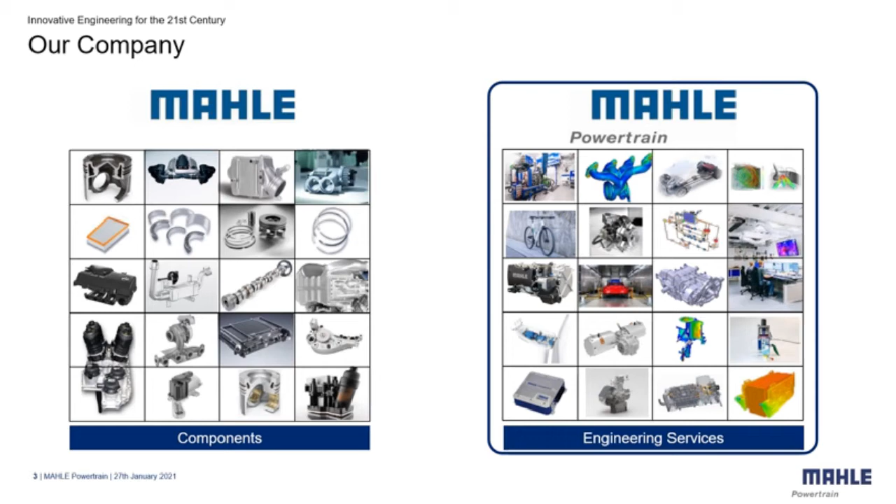Over the last 10 years, MAHLE Powertrain has been developing capabilities to enable us to support our customers with their hybrid and full electric propulsion systems, from bespoke transmission and battery packs to electric motors and power electronics. Whilst we focus on design and development of advanced vehicle propulsion systems, we also offer support to our customers for any part in the process, including the provision of prototype manufacturing.

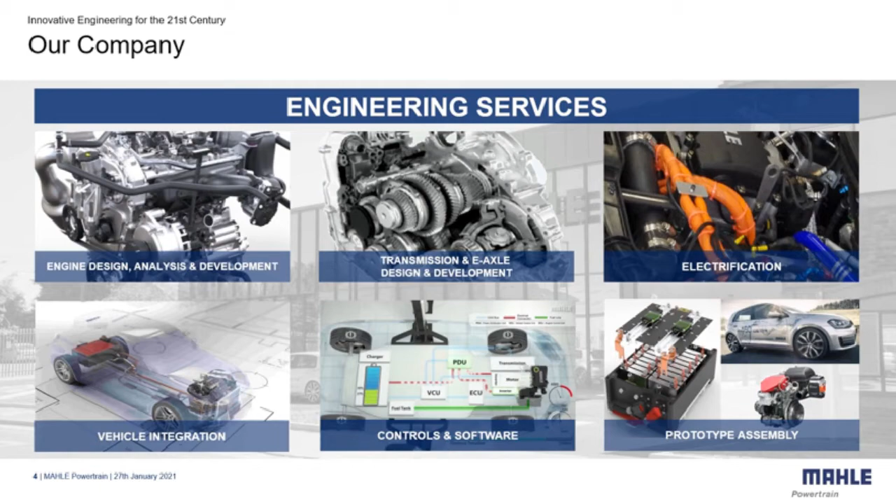I shall now take you through our core competencies. In design, we use our engineering capabilities to lay out designs for battery modules and packs, design high-performing internal combustion engines from clean sheet or as performance and emissions upgrades. We also design transmissions, e-axles and e-motors. We have a reputation for delivering running hardware to tight timescales, with many examples of hardware in less than 9 months.

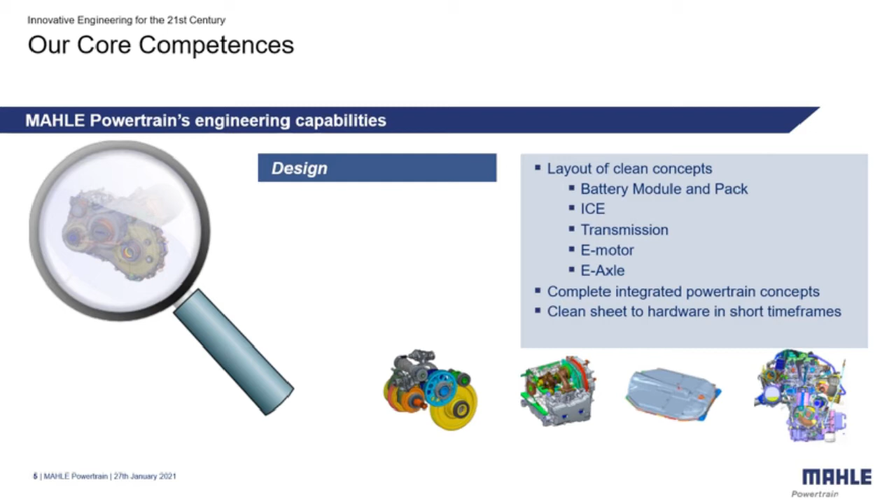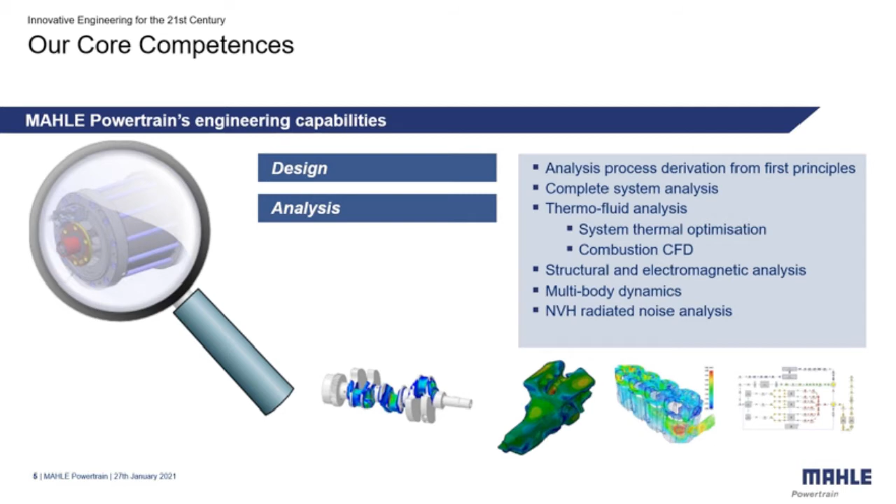In analysis, we have a strong team using a combination of 1D, 3D and thermofluid toolsets. We also have specialist gearbox and driveline software for analysis and optimization of transmissions. In development and testing, we have a lot of experience in hardware selection, development and validation. We're specialists in combustion system development and optimization processes, which are focused on meeting stringent future emissions standards.

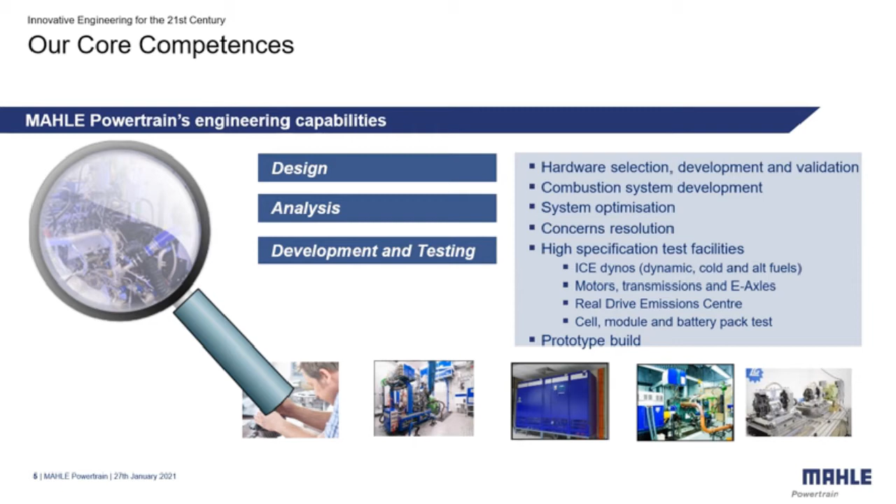This development capability is complemented by our well-resourced facilities, which include battery testing, internal combustion engine dynos, e-axle and transmission rigs. We also have our real drive emissions centre for testing vehicles under climatic conditions, which is a key part of our RDE process. In calibration and controls, we are very experienced in base engine optimization and base vehicle calibration. We're also experienced in developing demonstrator vehicles for performance upgrades and for newer technology assessments.

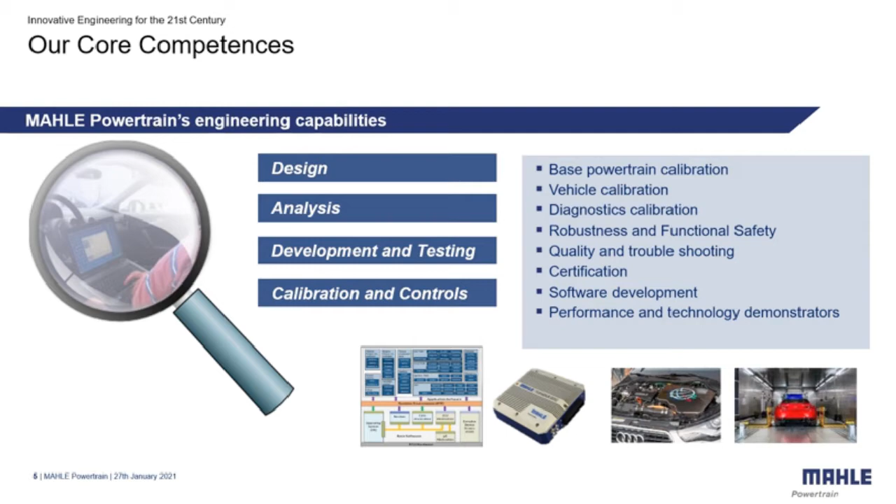Our tools and core competencies have allowed us to deliver exciting automotive projects. This is just a selection of high-performance automotive programs that we've been involved with over recent years. They include high-specific output internal combustion engines, novel combustion systems, transmissions and complete powertrains.

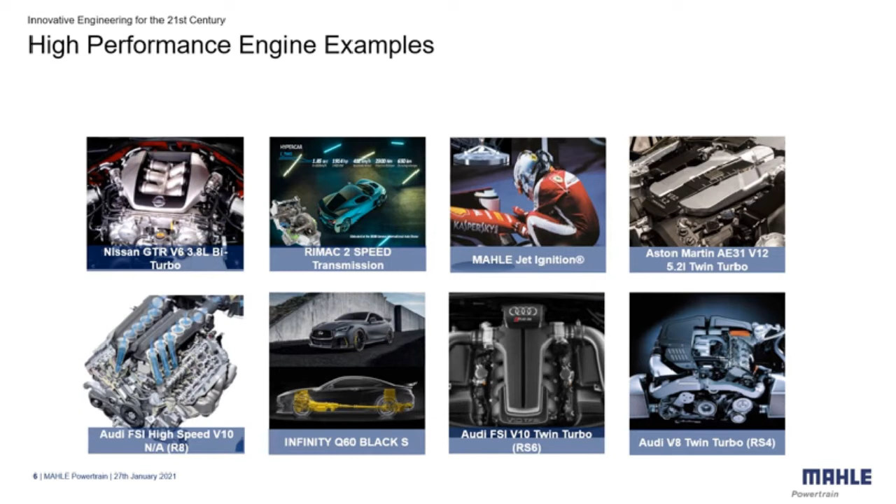So who are we and where do we come from? We're a team of talented people committed to creating innovative and sustainable solutions for our customers. MAHLE Powertrain can trace its roots back to the foundation of Cosworth in 1958, and in 1986 it put its first engine into production, the Ford Sierra Cosworth. In 1998, the road car division of Cosworth was acquired by Audi, creating Cosworth Technology. Then in 2005, MAHLE purchased Cosworth Technology from Audi and created MAHLE Powertrain. So MAHLE Powertrain has been active in the automotive sector for over 60 years.

During this time, our talented engineers have developed their skills in a broad spectrum of disciplines ranging from fundamental research, concept design, modelling, analysis and simulation, through to prototyping, testing, calibration, software development and systems engineering. These toolsets, coupled with our in-house developed tools and techniques, have also been successfully applied across multiple non-automotive sector projects to provide technical solutions for our ever-increasing range of customer projects.

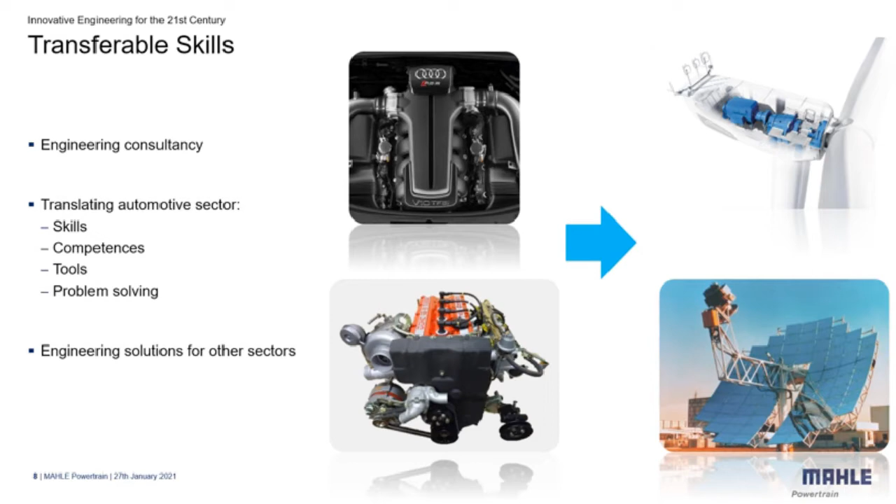In this next section of the presentation, we're going to take you through a selection of example projects showing how MAHLE Powertrain has diversified from our core automotive powertrain activities, delivering solutions into different areas, including renewable energy, aerospace, medical, off-highway, stationary power generation, and e-mobility.

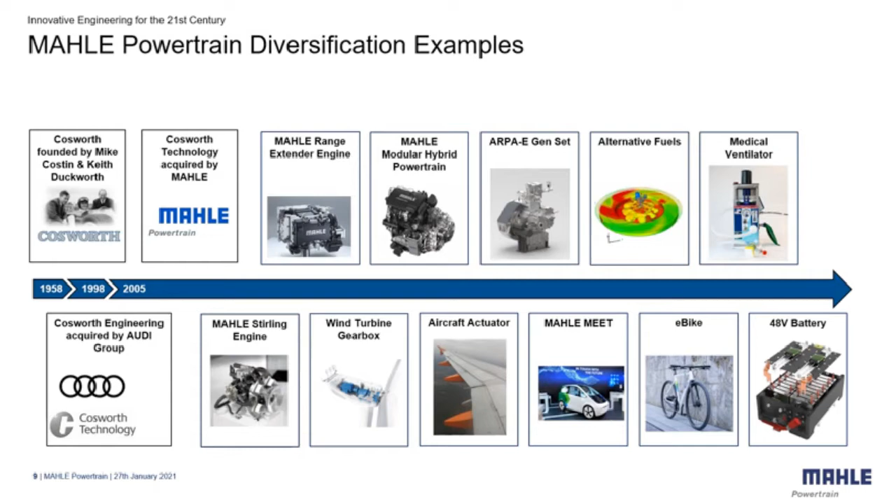The fast-changing legislative emissions and efficiency requirements for vehicle powertrains pose significant technical challenges. We've been developing innovative solutions to meet these requirements for future sustainable powertrains. During the past decade, the pace of this change has quickened and led us to develop a host of new capabilities and skills which we want to showcase today. Furthermore, we want to show how MAHLE Powertrain are able to support our customers to overcome their technical challenges.

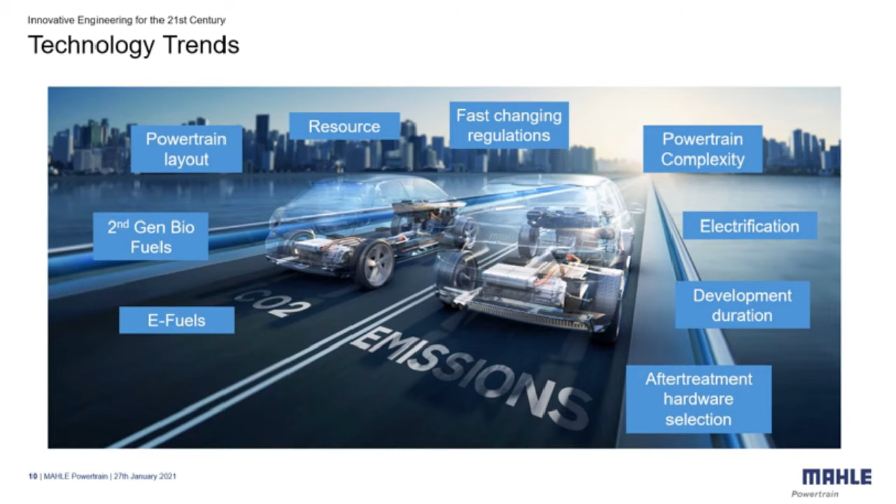Nowadays, we're all familiar with the concept of the electric vehicle, which is powered by an electric motor, and the sole source of energy to propel the vehicle is provided by a battery pack. 10 years ago, when we began our range extender project, the typical range of an electric passenger car was only around 80 to 250 kilometres, or 50 to 150 miles. The range of vehicles was limited by the large size, weight and high cost of the battery.

The idea of the range extender is that by the addition of an onboard generator, which could convert a liquid or gaseous fuel into electricity, the battery pack can be charged whilst the vehicle is moving. This enables the battery capacity to be optimised to the capacity that's needed just for typical daily use. And then for longer or infrequent journeys, the vehicle can be refuelled using existing conventional infrastructure, and the driving range is effectively limitless.

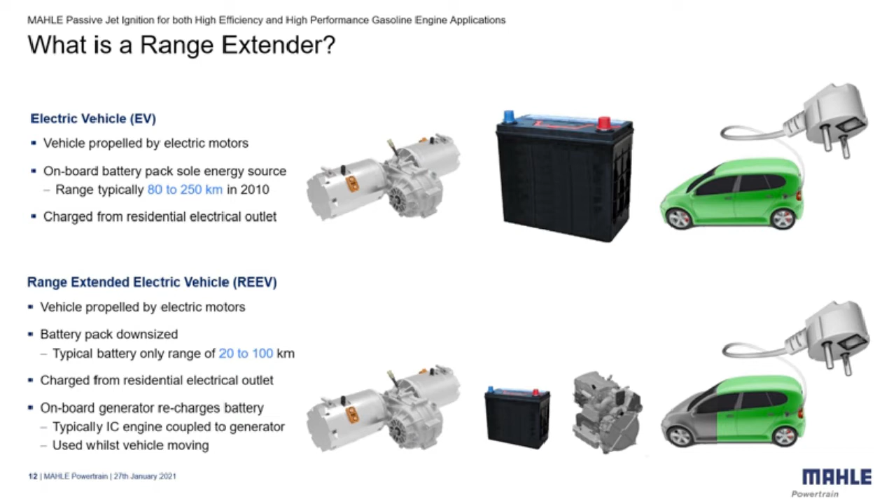As an initial step into hybrid and electric powertrain technologies, at the beginning of 2010, MAHLE Powertrain set about designing an engine specifically for use as a range extender. We undertook a concept study, produced the final design, and built the running prototype in under 12 months. The range extender engine design has been focused on meeting the requirements for a small to mid-size passenger car. During the concept phase of the project, key attributes for the engine were identified, and the resulting design has been targeted to achieve a very compact design with low weight and a low manufacturing cost.

To minimise size and weight, the axial flux generator is fully integrated into the crankcase of the engine, with the rotor mounted directly onto the crankshaft of the engine, like a conventional flywheel, without any separate bearings. To maximise the flexibility of installation and to maximise commonality across a range of applications, the unit can be installed either vertically or horizontally, using the same major castings.

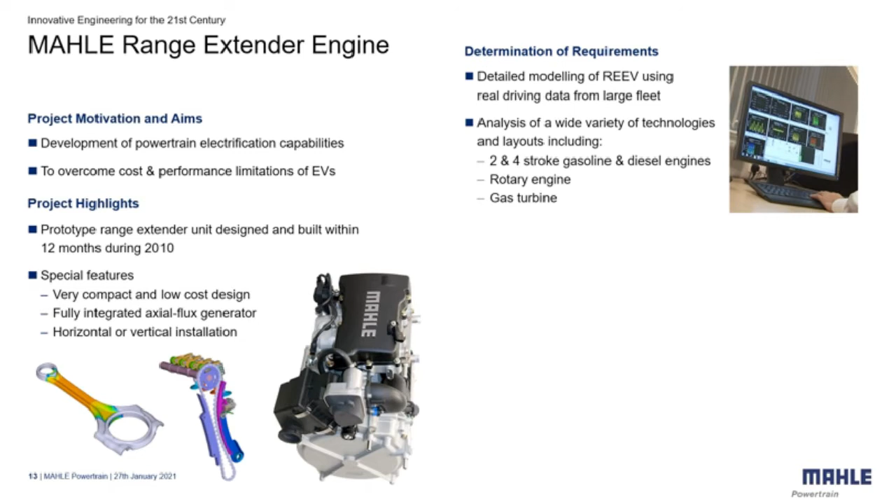Detailed vehicle analysis was performed to determine the required specification for the range extender. A wide variety of technologies were considered during the concept phase, including both 2- and 4-stroke engines and rotary and gas turbine engines, amongst many others. The project developed MAHLE Powertrain's capability in the design and testing of high-voltage electrical components and our capability to test high-voltage traction motors.

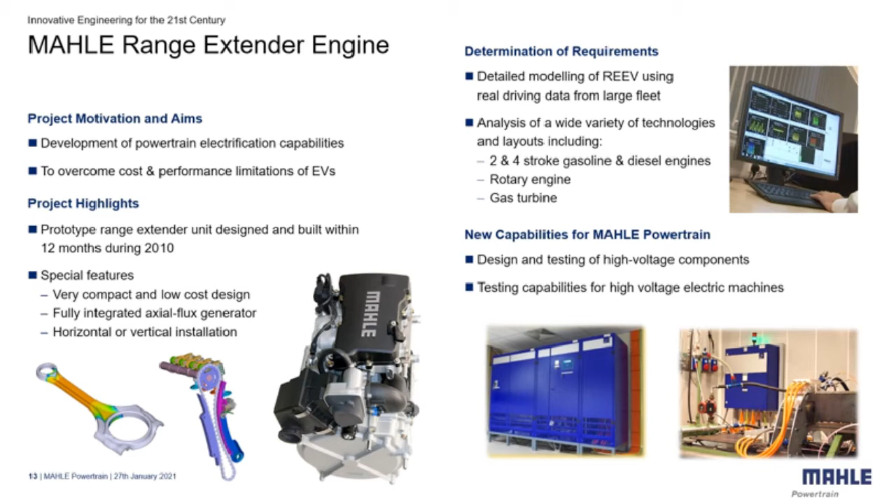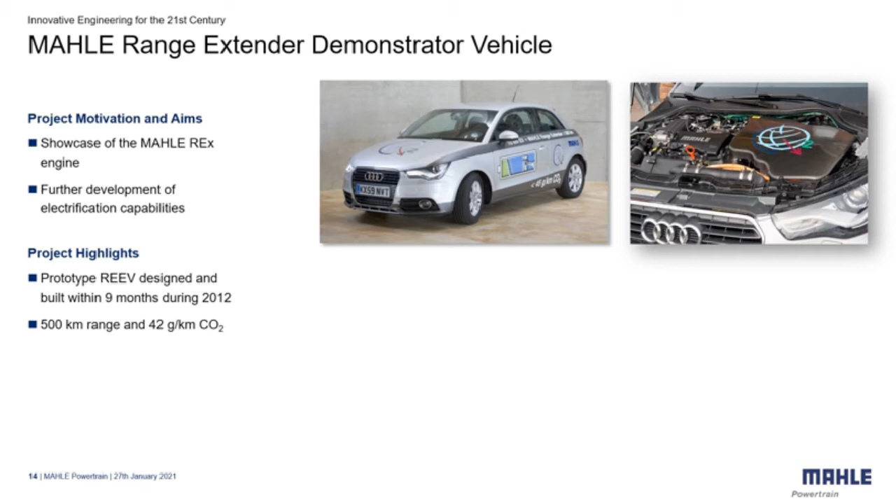In 2012, we undertook the design and development of a prototype range-extended electric vehicle as a showcase for our range extender engine. This also served to further develop our skills and capabilities in vehicle electrification. We undertook the complete vehicle conversion in just 9 months, including the development of the vehicle control system and full vehicle calibration.

We developed a GPS-based control system that used prior knowledge of the energy required to travel over the route, along with vehicle speed and gradient data to determine the optimum operating strategy for the range extender. This delivered a fuel saving of over 5% compared to a purely reactive strategy based on instantaneous vehicle speed and battery state of charge alone.

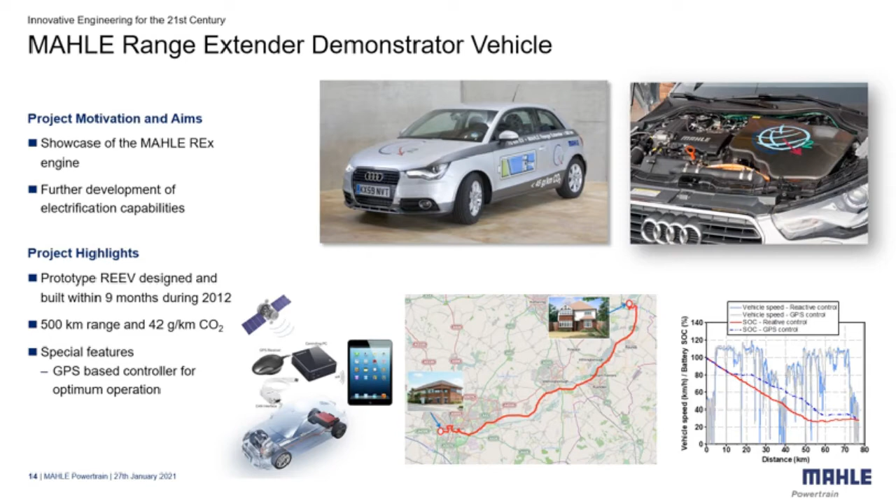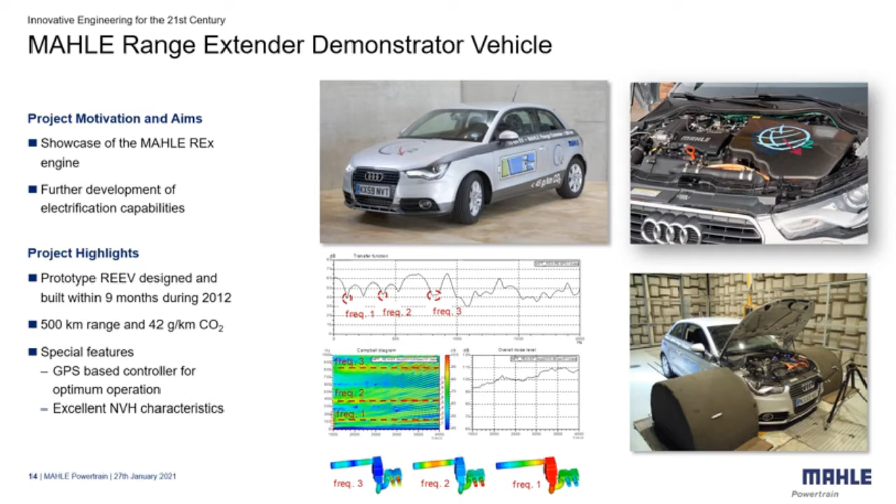The vehicle and engine have been developed to have excellent NVH, with the engine operation being barely perceptible to vehicle occupants. Additional features include a battery thermal management system that can control the battery temperature in hot and cold ambient conditions using the vehicle air conditioning and heating system. The analysis and development of the thermal systems was all done in-house using our detailed vehicle models linked to our thermal modelling tools, which can accommodate multiple coolant loops and AC circuits.

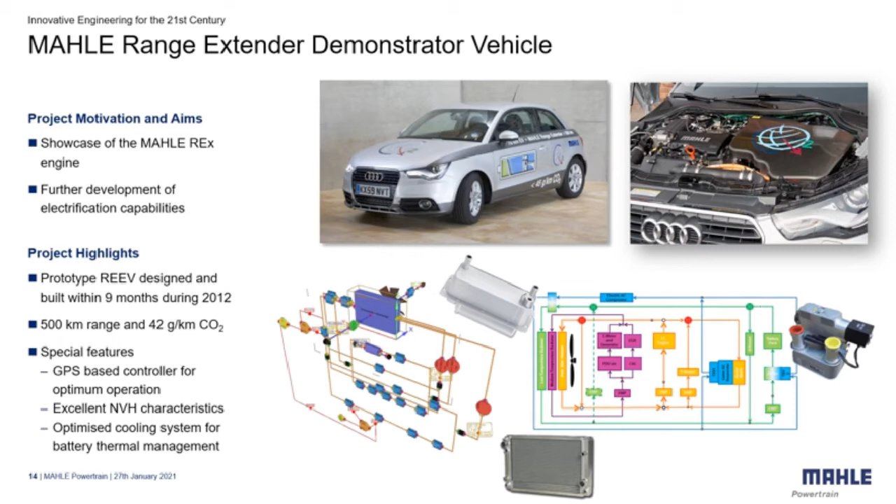All aspects of the vehicle conversion were undertaken in our in-house workshop facilities. We started with a conventional gasoline-engined vehicle with manual transmission and removed the powertrain, and then installed the complete high-voltage system and traction motor and our range extender unit. New capabilities include the capability to undertake the design and integration of the high-voltage systems into a vehicle.

We developed a flexible hybrid and electric vehicle control unit that has been subsequently used to enable rapid development of other complex prototype vehicles and also to control other complex systems. It has also given us detailed NVH and cooling system capabilities, ranging from analysis through to prototyping and complete system development.

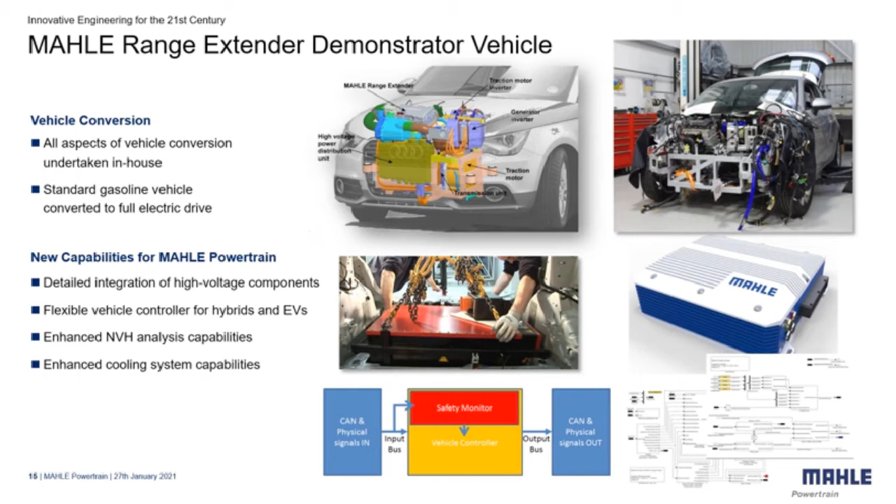Recently, we have updated our range extender concept to meet the requirements of vehicles for 2030 and beyond. The MAHLE Modular hybrid powertrain features an updated, dedicated hybrid engine design that achieves very high levels of brake thermal efficiency using a combination of cost-effective technologies. The port-fueled gasoline engine uses a novel pre-chamber combustion system we call jet ignition, or MJI. My colleague Mike Bunce will talk in more detail about this later. This system enables us to operate with a high geometric compression ratio and tolerate high levels of exhaust gas recirculation to achieve the high efficiency from the engine.

The modular hybrid drive system can be configured to enable it to suit a wide range of vehicles through a modular transmission design, which can operate in series or parallel hybrid drive modes. The transmission can be configured with 1, 2 or 4 gear ratios, depending upon the vehicle application requirements. The engine can be configured in 2 or 3 cylinder formats, and the power of the traction motor can be varied. These levels of flexibility enable the concept to be tailored to meet the requirements of a wide range of vehicles from 1,000 kilograms curb weight through to very large SUVs of 2.5 tons, whilst retaining maximum component commonality.

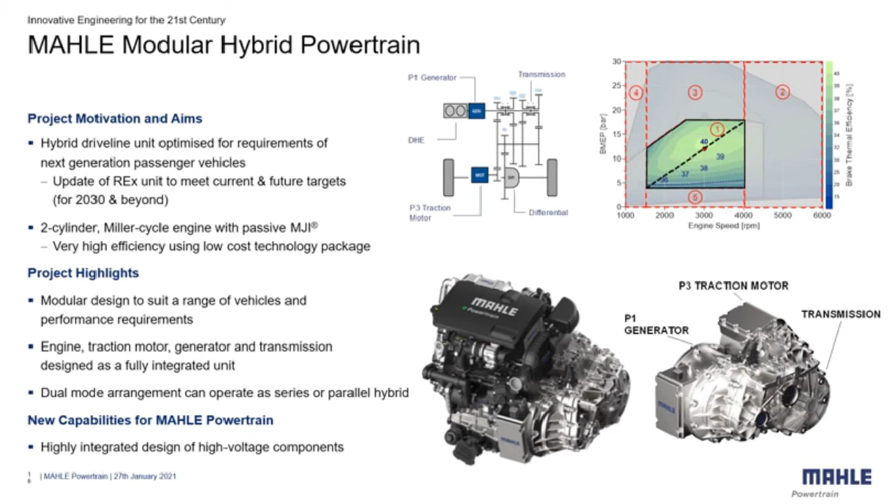MAHLE's Efficient Electric Transport, or MEET for short, is the vehicle concept for tomorrow's urban mobility. The target was to develop a 48-volt highly efficient vehicle optimized to meet the requirements for city driving. The vehicle is also intended to be a showcase for our parent company's e-mobility products. The MEET car features a twin-motor drive system where each motor drives one of the rear wheels independently and features a 15 kilowatt-hour battery pack, which can deliver 60 kilowatts of electrical power at only 48 volts. The use of a 48-volt powertrain is estimated to reduce production costs for the traction motor and power electronics in production by 25%.

MAHLE Powertrain were responsible for the design of the transmission and traction drive system integration, as well as the vehicle build and development. We also used our flexible vehicle controller to enable the development of the vehicle to be achieved in a very short time frame.

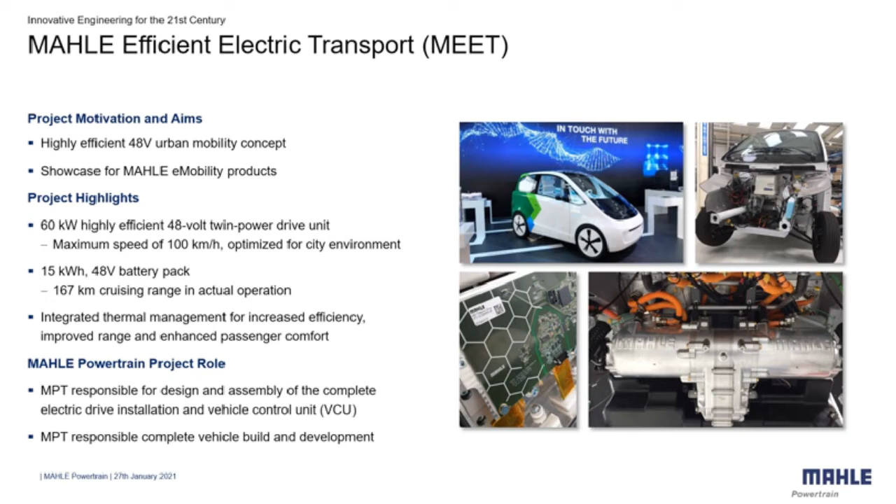MAHLE Powertrain has experience developing micro CHP systems for power generation. We developed this capability through a project that we had funded by ARPA-E, which is a division of the U.S. Department of Energy, through their GenSets program. The objective of this program was to develop a high efficiency, low emissions, long life 1 kilowatt micro CHP genset, and it was to be used for permanent residential power and heat, and it was meant to be supplementary to the grid. Some of the project partners on this project included Kohler and Oak Ridge National Lab.

The concept that we proposed was a natural gas fueled, very high stroke to bore, low friction, clean sheet engine design. This engine operated ultra lean for increased thermal efficiency. We also incorporated high efficiency heat extraction components on this engine and also used low temperature aftertreatment to meet the emissions requirements. You can see an image of the engine in the upper right, and then in the upper left is a diagram of the complete system that we were developing.

The results of this project were that we developed multiple engine families, one a single-cylinder 1 kilowatt engine, and then a 2-cylinder family of engines from 3 to 10 kilowatts. All of these engines exceeded their thermal efficiency targets. You can see the chart on the bottom right shows that our 1.5 kilowatt engine achieved a peak brake thermal efficiency that was an increase of approximately 20% over current state of the art in the 1 to 2 kilowatt size class, and this was done at a 50% reduction in cost versus its closest competitor.

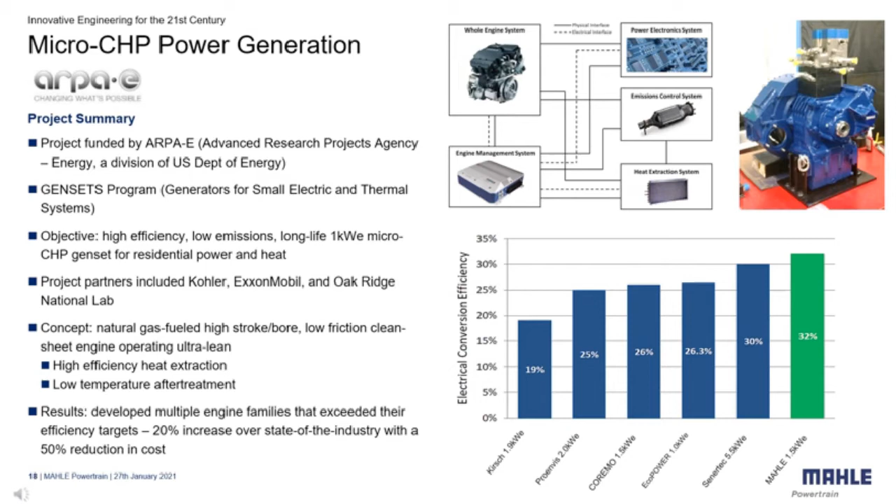We used some of our core competencies at MAHLE Powertrain to execute this project, but the project also allowed us to diversify those competencies at the same time. On the design side, we designed a base engine, and we took a systems approach to designing this engine as well. It was a clean sheet engine design, which we have experience with, but we've never really used it in the context of a system design that had so many competing interdependencies.

So for instance, when we were looking at an engine that generated a very high degree of thermal efficiency, the heat extraction of the engine would also suffer. So the CHP portion needed to really be in balance. In order to do that, we had to diversify our design capabilities so that we could manage all of the system interdependencies. On the analysis side, we developed a system efficiency prediction utilizing some of our existing analysis expertise.

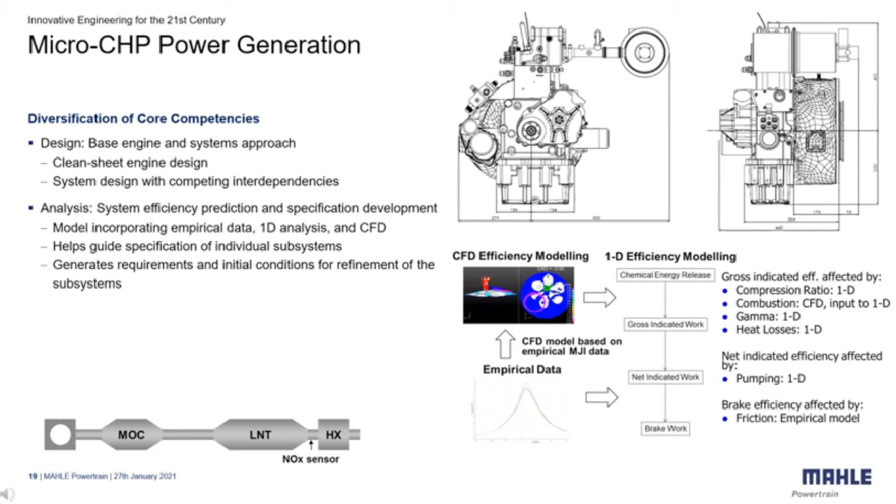The model that we developed incorporated empirical data, 1D analysis, and CFD analysis, and we used this to provide an initial prediction of the efficiency of both the engine and the system. This model, in turn, was used to help guide the specification of the individual subsystems, including the engine, and from that specification, we then generated requirements and initial conditions for the subsequent refinement of those subsystems. So we're using our analysis capabilities that we have existing, but we're able to diversify how we use analysis and how we generate boundary conditions for an entire system.

On the development side, we have engine and system testing experience, but in this case we had to develop an engine dyno that was capable of providing very high resolution efficiency data from a single cylinder engine, which is a notoriously difficult thing to do. So we developed an engine and dynamometer system that gives us this very high accuracy on the efficiency data that we're trying to track. We also incorporated iterative flow bench reactor and engine testing to be able to develop the advanced lean aftertreatment package with Oak Ridge National Lab.

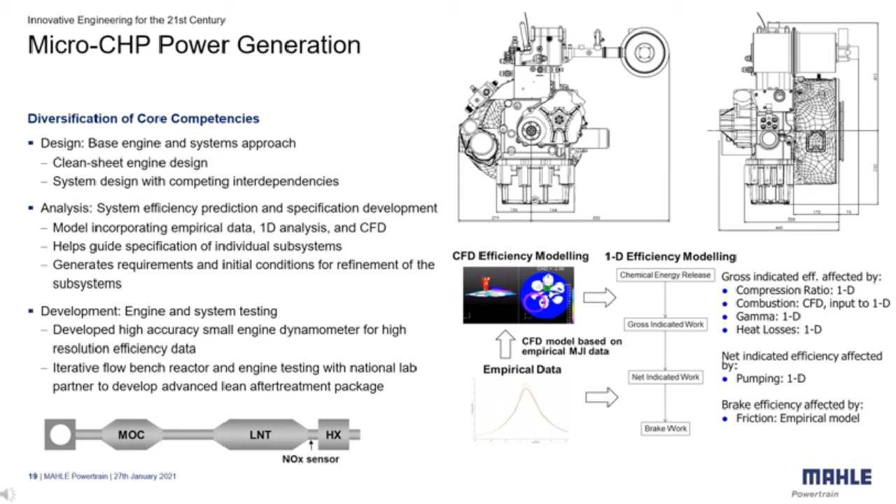MAHLE Powertrain has experience in the area of alternative fuels. One of our most recent projects was a commercial program with an OEM. The objective of this project was to develop a safe, stable, hydrogen-fueled combustion system for heavy-duty off-road applications. Hydrogen is a fuel of interest in the European Union currently due to its classification as a zero-carbon fuel. The challenge with hydrogen fuel is that it is highly prone to pre-ignition and to knocking due to its low auto-ignition temperature. In heavy-duty applications with large bore sizes, this problem is exacerbated by the long travel distance associated with heavy-duty operation.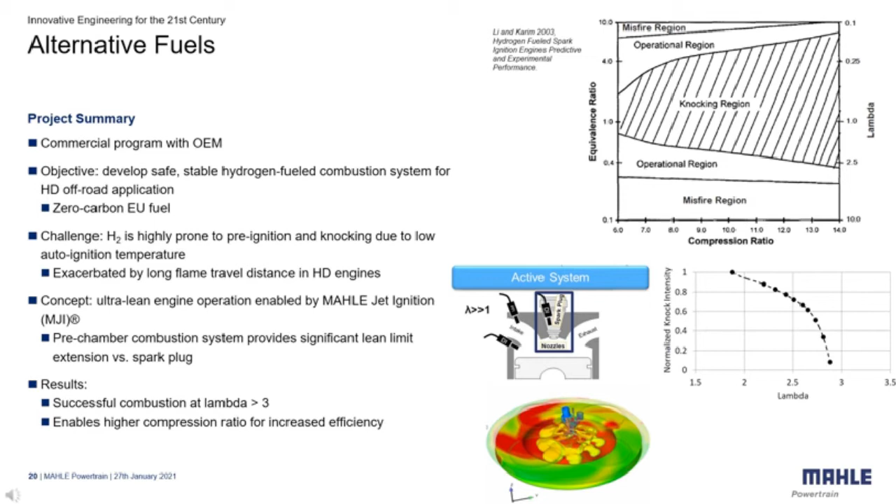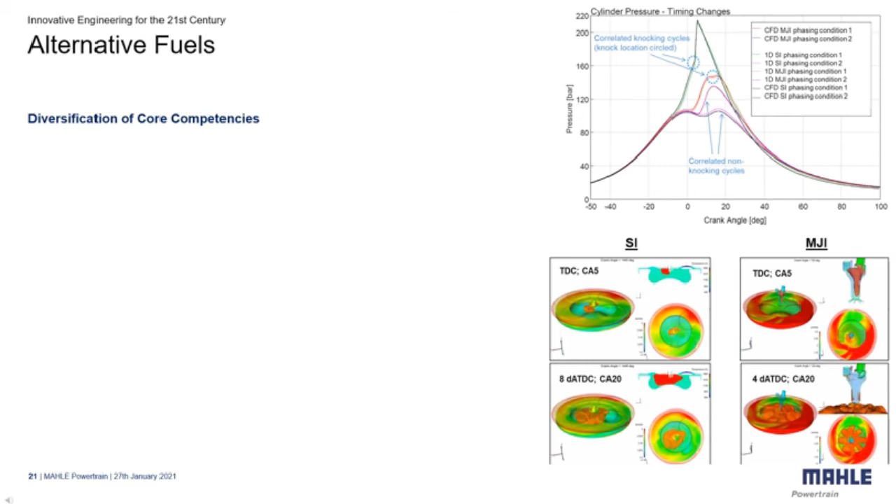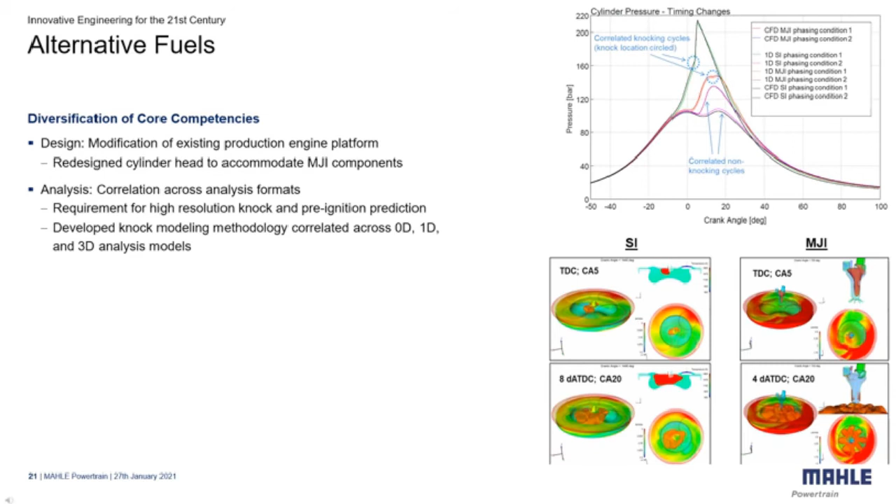The design competency required to execute this hydrogen combustion program involved modification of an existing production engine platform. In this case, we redesigned the cylinder head to accommodate the MJI components. On the analysis side, we had two key areas of analysis that we needed to focus on. The first was correlation of knock models across multiple analysis formats. So because hydrogen combustion is very prone to auto-ignition and pre-ignition, we had a requirement for very high resolution knock and pre-ignition prediction. So to do that, we utilized 0D, 1D, and CFD knock models, and we developed a methodology to correlate the knock modeling across those three packages so that we could use each of the three packages to further guide development of the combustion system.

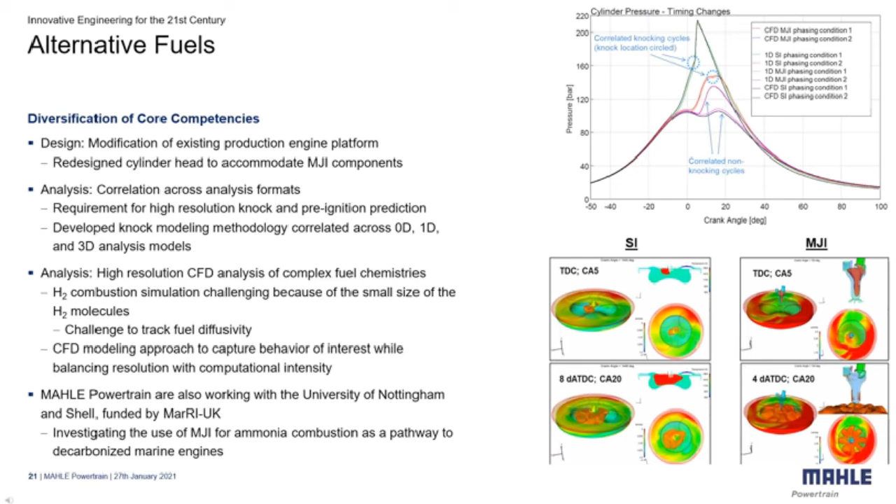Also on the analysis side, we had to develop a high-resolution CFD analysis. This was because the fuel chemistries associated with hydrogen combustion are fairly complex, and of course, hydrogen molecules are very small, so this tends to present a challenge for tracking fuel diffusivity. So we needed to develop a CFD modeling approach that was able to capture the behavior of interest while also balancing this resolution with computational intensity. We applied these competencies and the diversification of these competencies to hydrogen combustion. We are also working with a variety of global partners in the area of ammonia combustion system development, and we are applying the same tools to be able to accomplish that.

Another good example of MAHLE Powertrain's diversification is the MAHLE Stirling engine. This represented an investment in zero carbon power generation with electrical energy generated directly from the sun. MAHLE Powertrain designed and developed the first concept demonstrator engine running on the testbed in 2011. In early 2012, the targets for performance and efficiency were exceeded, an example of true first principles understanding and a fully integrated engineering system approach.

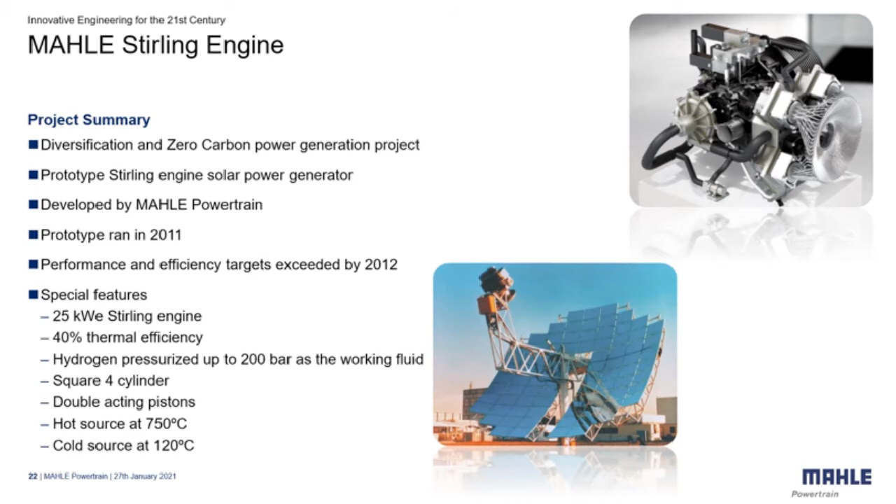MAHLE's first clean sheet Stirling engine presented many challenges. As we were starting from a clean sheet, all the components needed to be evaluated from first principles. The project utilised literature research, established automotive techniques, and new simulation methods.

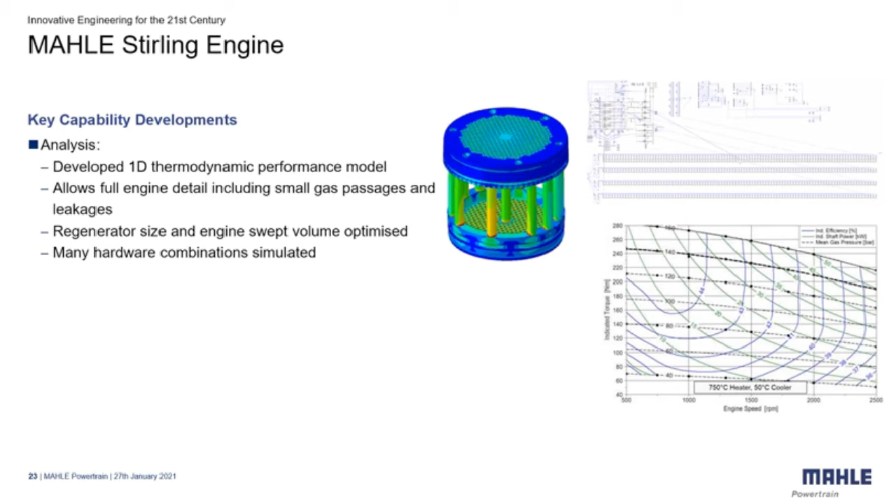As an example of where our automotive analysis techniques were applied was in the creation of a highly detailed 1D thermodynamic performance model. This was used to lay out the basic engine geometry and optimise the swept volume. It also allowed many hardware combinations to be assessed, allowing rapid refinement of the concept.

In order to confirm the performance and efficiency of the prototype Stirling engine, our automotive internal combustion engine test facilities were modified to allow safe engine and rig testing. This included commissioning of the hydrogen safety systems and construction of a gas burner to replicate the sun. Through this project, MAHLE Powertrain gained theoretical and practical experience with the Stirling engine machine.

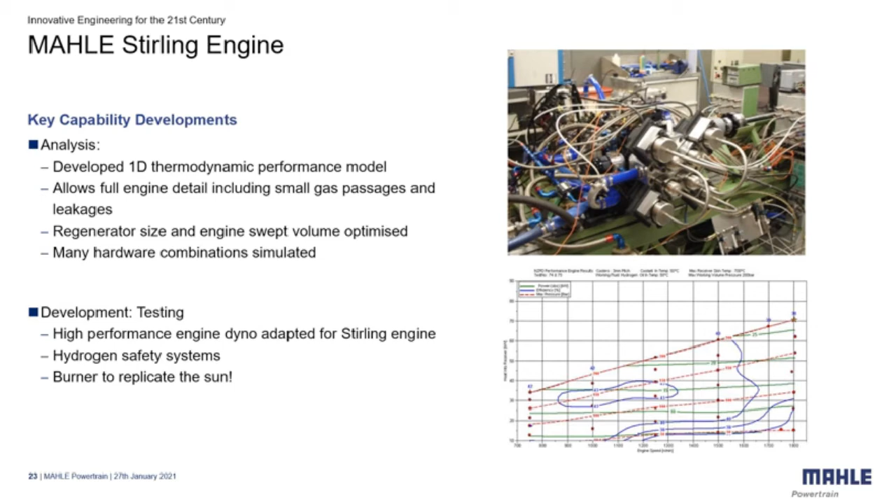Modern wind turbines are characterized by high mechanical and high aerodynamic efficiency. While the mechanical efficiency is significantly influenced by the losses in the transmission, the aerodynamic efficiency also depends on the diameter of the nacelle in relation to the rotor diameter. The aim of the transmission is thus to be able to support high rotor torques with a small transmission diameter.

In practice, this is achieved through the use of planetary gears, which can achieve a high power density through their internal power distribution to several planets. The planetary gear, which has to support the rotor torque, is naturally the most heavily loaded. Gear topologies in which the rotor torque is supported not only by one but several planetary gears can have significant advantages in terms of power to weight ratio.

In a study for a wind turbine manufacturer, all capable gear topologies up to 4 planetary gears were systematically determined. The self-developed transmission synthesis program PlanGear was used for this purpose. PlanGear determines and evaluates all transmission topologies with full computer support. The weight and efficiency of the transmission system were mainly used as evaluation criteria. In the end, the result was a handful of gear structures that, compared to today's known transmissions, have the potential for a higher power density and a smaller outside diameter.

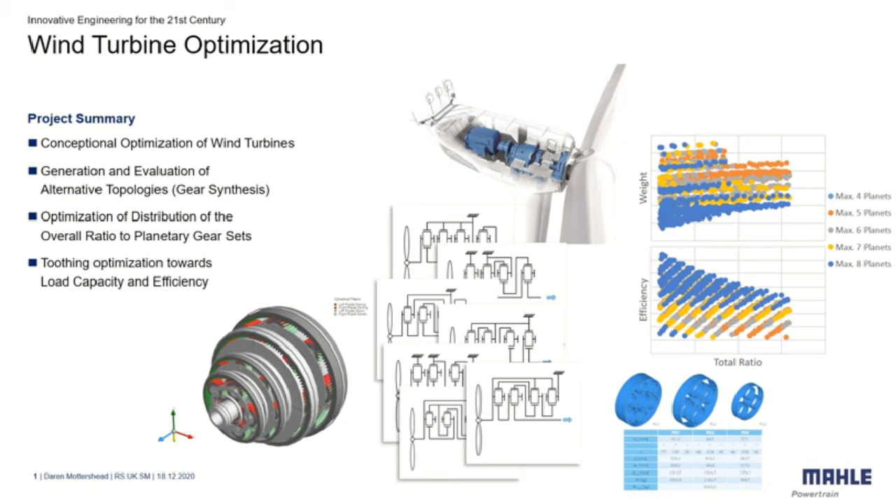However, it is not only the transmission topology that has a strong influence on the efficiency of the wind turbine, but also the losses in the individual gear meshes of each gear stage. The efficiency of a gear mesh always has a conflict of objectives with regard to lifetime and noise of the transmission. While MAHLE Powertrain uses the in-house developed synthesis program PlanGear to select the optimal transmission topology, a large number of tools are used to optimize the design.

Here, exact calculations are only possible if you not only consider individual components, such as gearing, but the entire system. MAHLE Powertrain uses, for example, software packages such as MASTA or PERMAS for system and component analysis. With the help of finite element analysis, precise stress calculations and lifetime predictions can be made. Detailed analysis for vibrational excitations from gears is also carried out, taking the overall system into account. Vibrations can be decisive for lifetime and strongly influence the noise behavior.

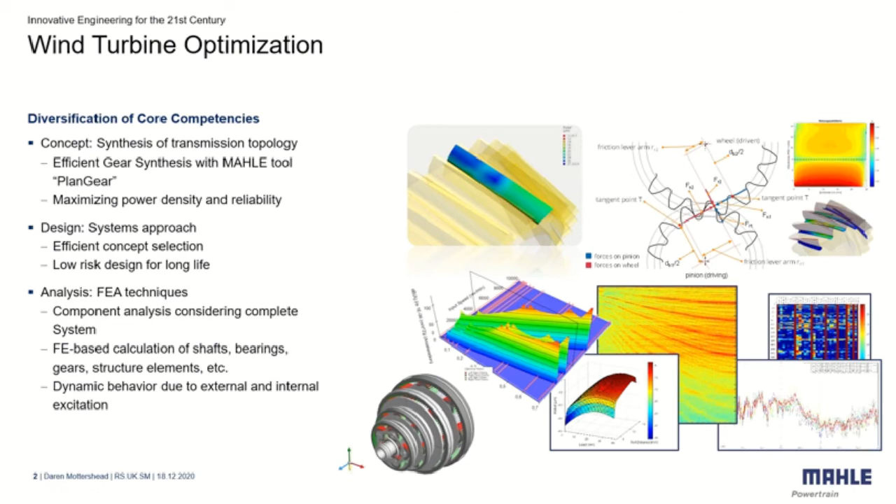Another project was an aviation project. Here, a so-called flight rotary actuator was optimized. The landing flaps on the wing of an aircraft are operated with the aid of the transmission using a very high gear ratio. A motor drives a master shaft that runs almost along the entire wing and operates the flaps via several flight rotary actuators. Those consist of a bevel gear and a so-called Wolfrom planetary gear.

A Wolfrom gear has the great advantage of being able to provide a high gear ratio and a high load capacity with a very low weight. The disadvantage is the relatively high losses that are inherent in them. In a research project, MAHLE Powertrain optimized the Wolfrom planetary gearbox.

The Wolfrom gear consists of a driven sun gear that meshes with the planets. The planets on the carrier mesh with 2 ring gears that have a slightly different number of teeth. While one ring gear is fixed via the housing, the other ring gear drives the linkage of the landing flaps. The carrier rotates freely and is not connected to outside. To optimize the Wolfrom set in terms of load capacity and efficiency, the gear meshes of the planetary set were revised and the planet carrier redesigned.

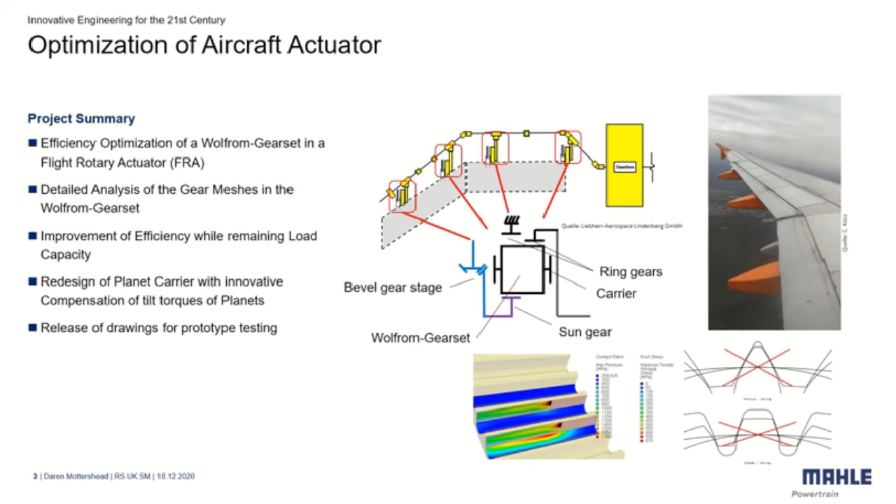The tooth forces generate large tilt torques on the planets, which normally lead to larger displacement on the planets in relation to the ring gears. This leads to a poor load distribution along the face width of the gear meshes and hence to a wasted load capacity potential. In addition, with the usual gear designs, decisive losses occur at the tooth meshes.

As part of a research project for the transmission supplier, MAHLE Powertrain developed an optimized design for the Wolfrom gear. For this purpose, the starting point was first analyzed in detail in order to identify optimization potential. With an innovative gear design, the transmission losses could be significantly reduced. However, this new gear design needs an improved load distribution along the gear meshes to meet the required load capacity.

This was achieved using a new type of carrier design with significantly increased stiffness. Now, the tilting torques on the planets are not balanced by radial bearings, as usual, but by axial bearings. Overall, this results in significantly lower deformations, keeping weight constant. Finally, the transmission losses could be significantly reduced without having to accept disadvantages in terms of weight and load capacity.

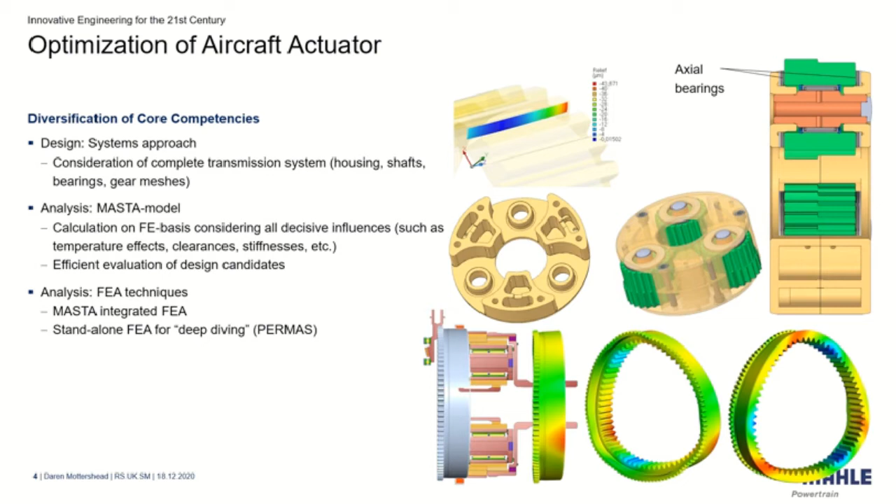48-volt mild hybrids can match the fuel-saving benefits offered by higher voltage hybrid vehicles. Due to the reduced electrical system safety risks, there are cost benefits to using a lower voltage hybrid system. However, depending upon the vehicle size and hybrid architecture, up to 20 kilowatts electrical regeneration capability is required to maximize the fuel savings. But only a very small energy storage capacity is required. Having a low storage capacity reduces the size, weight, and cost of the battery pack, but achieving a high power from a low capacity battery pack can be challenging.

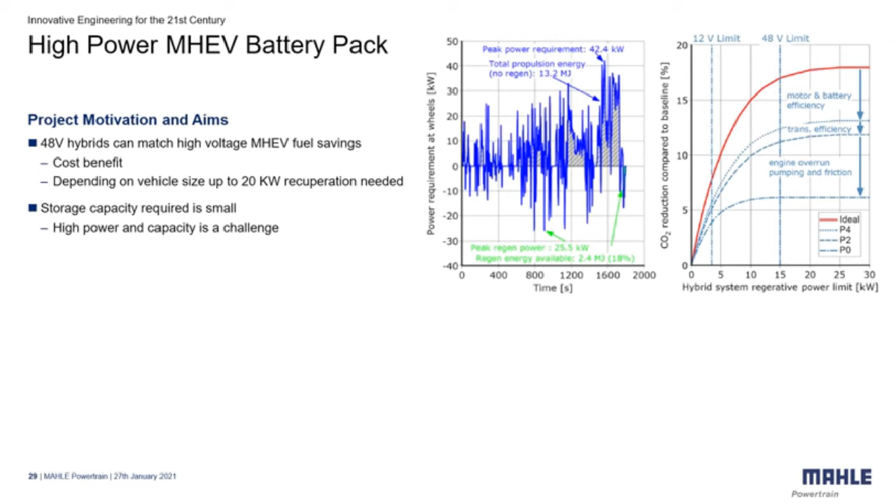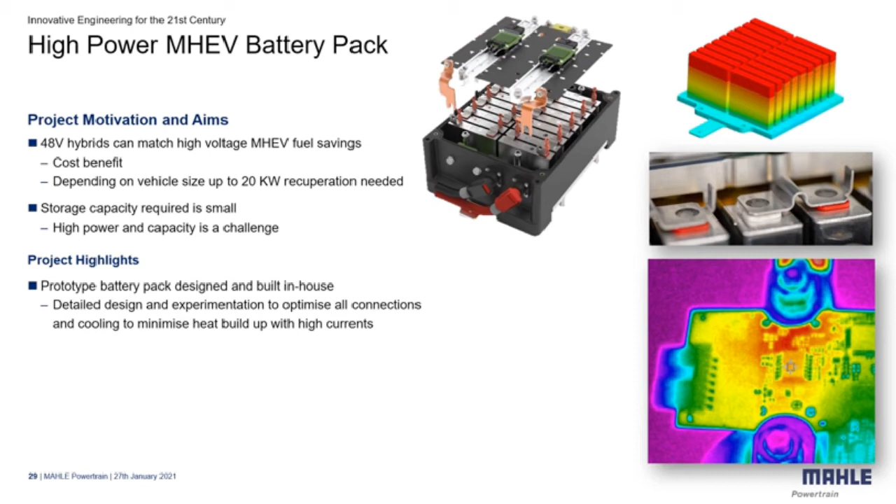As a showcase for our capabilities, we designed a high power, low capacity pack optimized for 48-volt mild hybrids. We undertook very detailed thermal and electrical flow analysis, supported by extensive testing, to optimize the design of the bus bars and cell tab welding patterns to minimize electrical resistance and temperature buildup within the pack. We've tested the pack in our facilities in Northampton and achieved charge and discharge levels of up to 20 kilowatts for over 10 seconds and can operate at power levels of 10 kilowatts continuously. This project has developed our capabilities in the detailed design and analysis of battery packs and our testing capabilities for cells, modules, and complete packs.

Another opportunity to apply our tools and processes came in March 2020 with the coronavirus pandemic. On the 13th of March, Team Consulting was approached to partake in a UK government-led consortium of technology consultancies who were given the task of producing tens of thousands of new ventilators within just 4 weeks. This requirement was in response to modelling which suggested that the NHS intensive care unit capacity may not be sufficient for the number of patients requiring ventilation support. With a clear design direction established and multiple proof of concept prototypes on test, Team Consulting approached MAHLE Powertrain on the 24th of March to discuss how simulation could assist with de-risking their design.

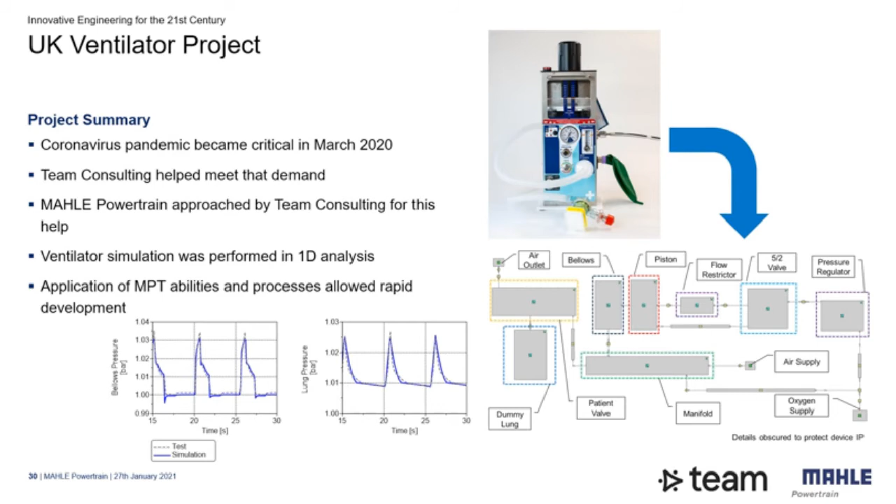The brief was to construct a 1D model of the ventilator and patient lung. This model could then be used to assist with specifying components, performing sensitivity studies, and characterizing system performance prior to approval testing. MAHLE Powertrain was able to react very quickly to the call to help, with the first full simulation being operational in just 3 days. This rapid turnaround did not happen by chance, as we already had extensive mechanical simulation experience. The ventilator required the simulation of several different valve types. Valve simulation is a routine part of automotive simulation, for example in fuel and oil systems, and in dedicated hydromechanical models. Typical losses and clearance were applied through experience.

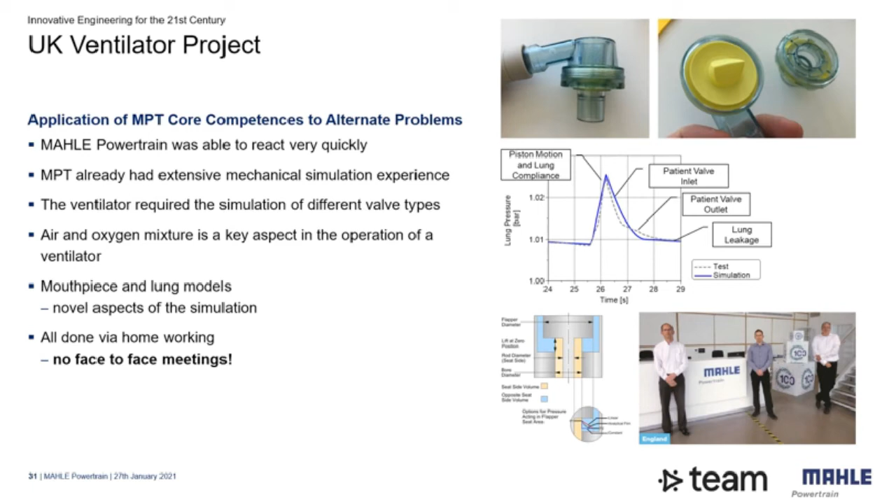Air and oxygen mixture is a key aspect in the operation of a ventilator, and we already have experience in fluid mixture simulation from our work in the automotive sector. Mouthpiece and lung models were a novel aspect of the simulation, and these were generated by building on existing simulation experience. Deep knowledge of the software made this possible in the given time, and this was all done via home working with no face-to-face meetings. Innovation is a key part of being an engineering consultancy in the 21st century. In this presentation, we've shown how MAHLE Powertrain has adapted to changing demands and how it has used skills and tools honed in the automotive sector to solve engineering challenges in other industries.

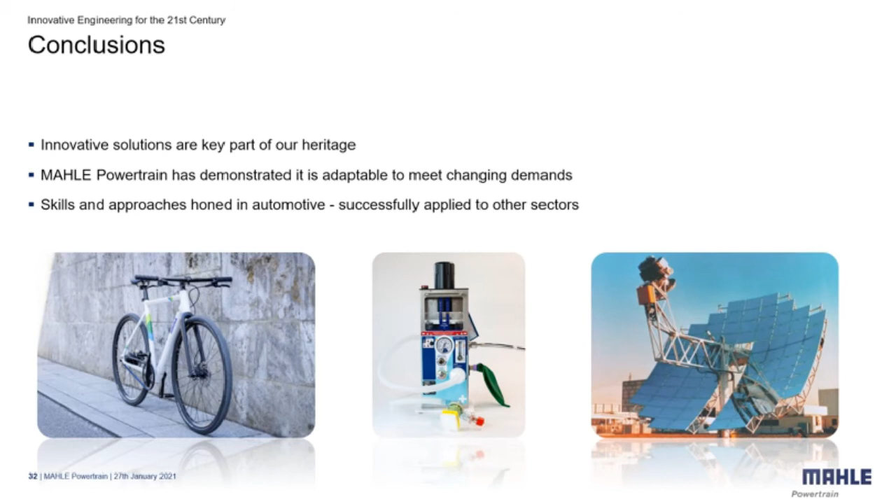Okay, thank you, everybody. I'd like to thank our... Sorry, getting a bit of echo there.